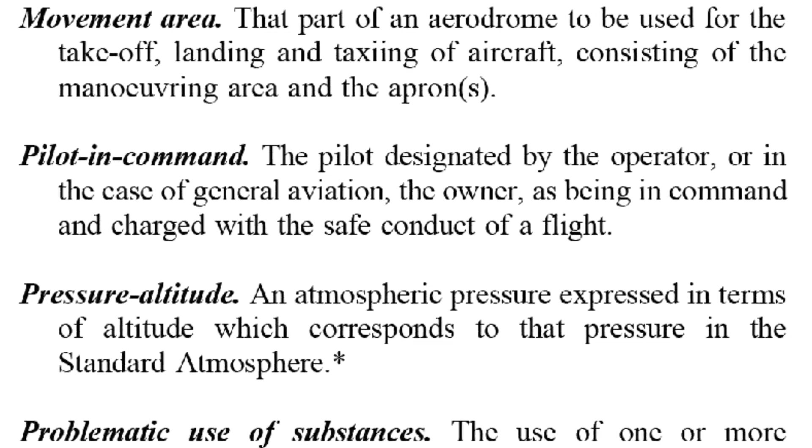Movement area: that part of an aerodrome to be used for the takeoff, landing, and taxiing of aircraft, consisting of the maneuvering area and the apron.

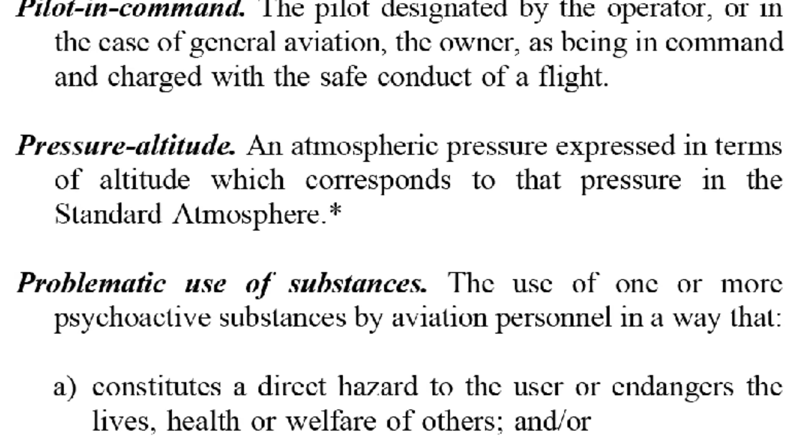Pilot in command: the pilot designated by the operator, or in the case of general aviation, the owner, as being in command and charged with the safe conduct of flight.

Pressure altitude: an atmospheric pressure expressed in terms of altitude which corresponds to that pressure in the standard atmosphere.

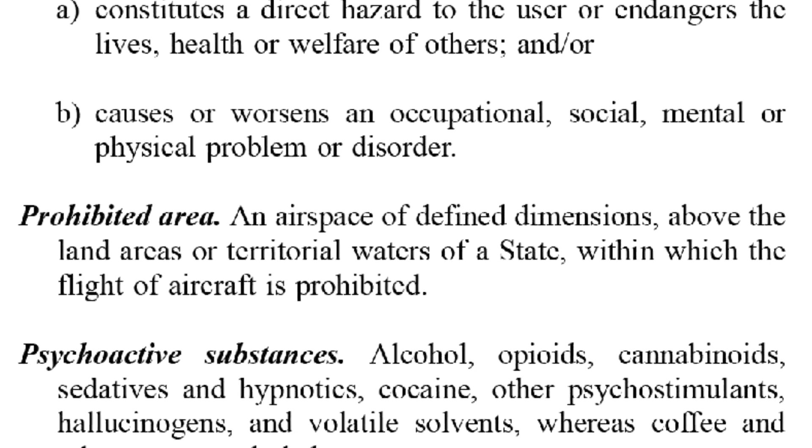Problematic use of substances: the use of one or more psychoactive substances by aviation personnel in a way that (a) constitutes a direct hazard to the user or endangers the lives, health, or welfare of others, and/or (b) causes or worsens an occupational, social, mental, or physical problem or disorder.

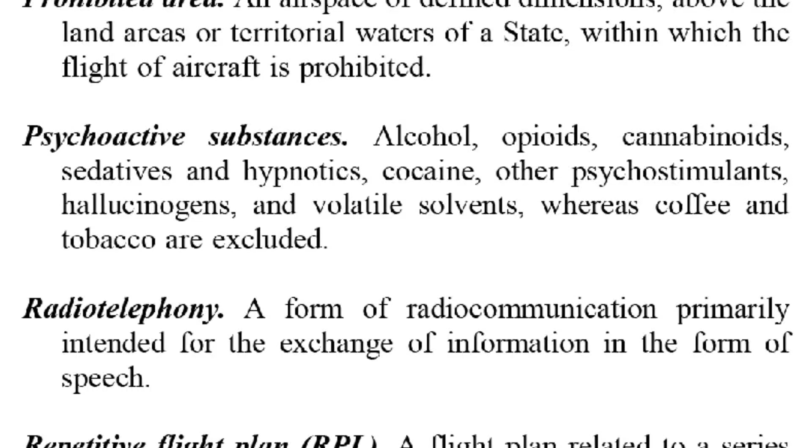Prohibited area: an airspace of defined dimensions above the land areas or territorial waters of a state, within which the flight of aircraft is prohibited.

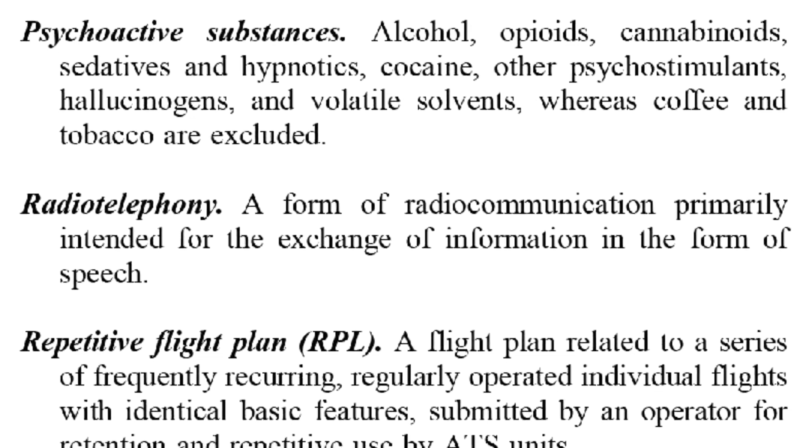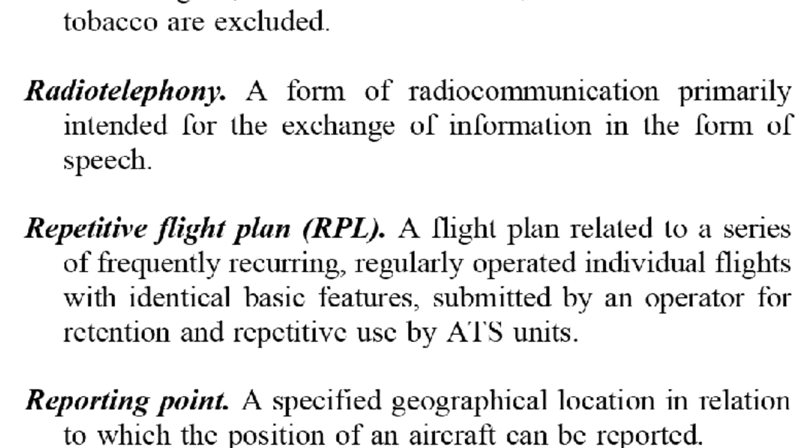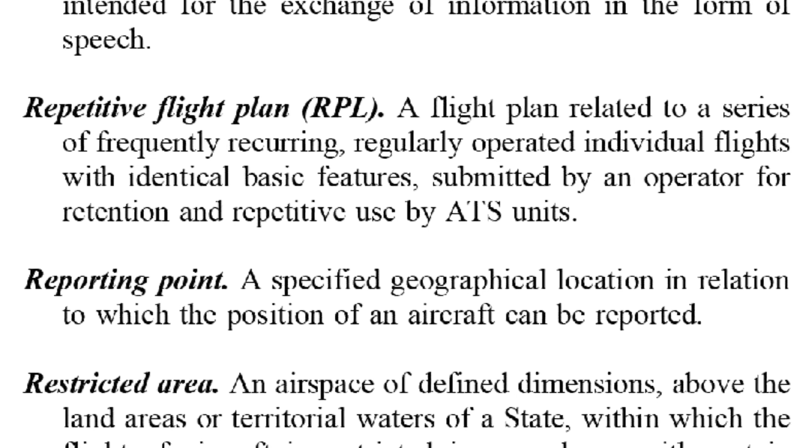Psychoactive substances: alcohol, opioids, cannabinoids, sedatives and hypnotics, cocaine, other psychostimulants, hallucinogens, and volatile solvents, whereas coffee and tobacco are excluded. Radiotelephony: a form of radio communication primarily intended for the exchange of information in the form of speech.

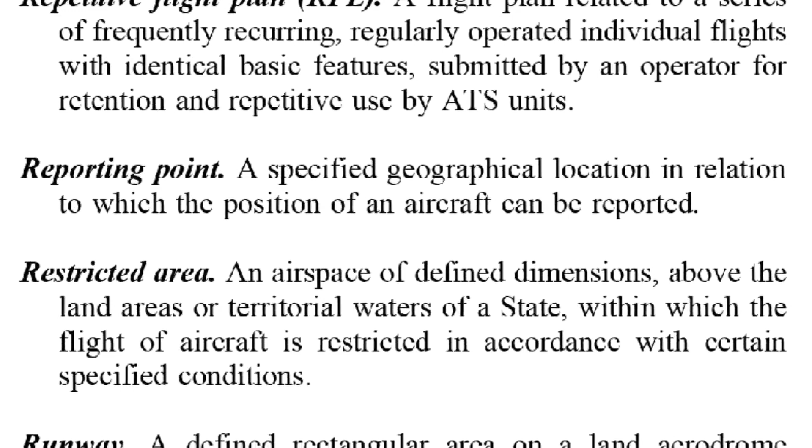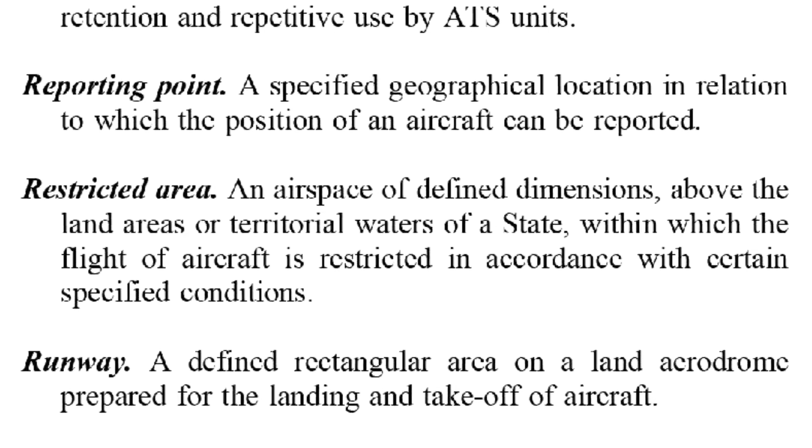Repetitive Flight Plan, RPL: a flight plan related to a series of frequently recurring, regularly operated individual flights with identical basic features, submitted by an operator for retention and repetitive use by ATS units.

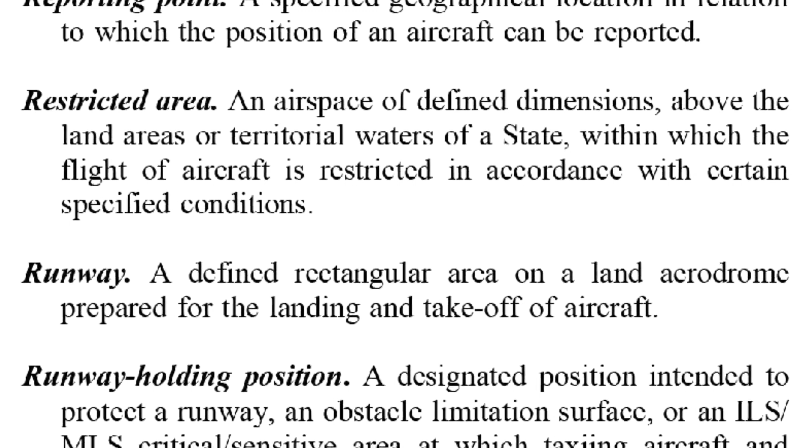Reporting point: a specified geographic location in relation to which the position of an aircraft can be reported.

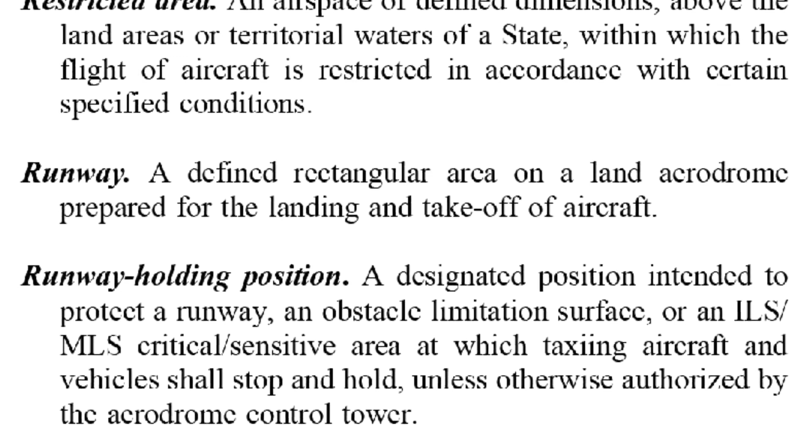Restricted area: an airspace of defined dimensions above the land areas or territorial waters of a state, within which the flight of aircraft is restricted in accordance with certain specified conditions.

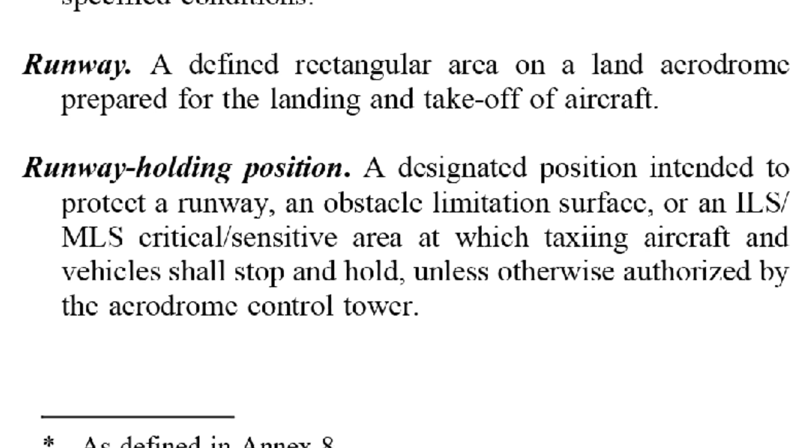Runway: a defined rectangular area on a land aerodrome prepared for the landing and takeoff of aircraft.

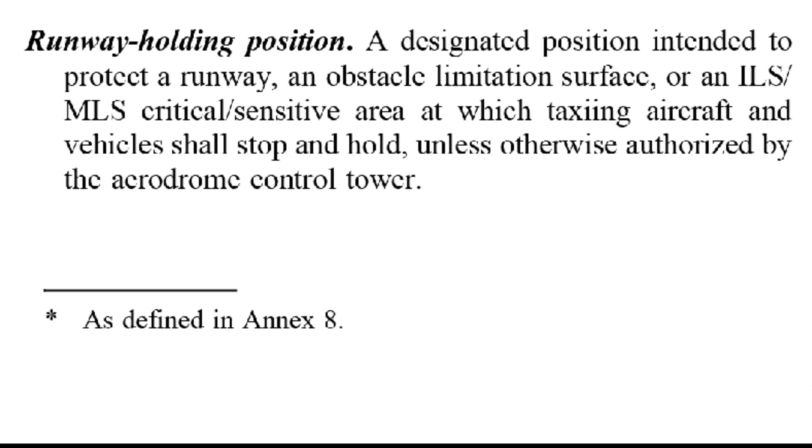Runway-holding position: a designated position intended to protect a runway, an obstacle limitation surface, or an ILS or MLS critical or sensitive area, at which taxiing aircraft and vehicles shall stop and hold, unless otherwise authorized by the aerodrome control tower. Note: in radiotelephony phraseologies, the expression 'holding point' is used to designate the runway-holding position.

Safety-sensitive personnel: persons who might endanger aviation safety if they perform their duties and functions improperly, including but not limited to crew members, aircraft maintenance personnel, and air traffic controllers.

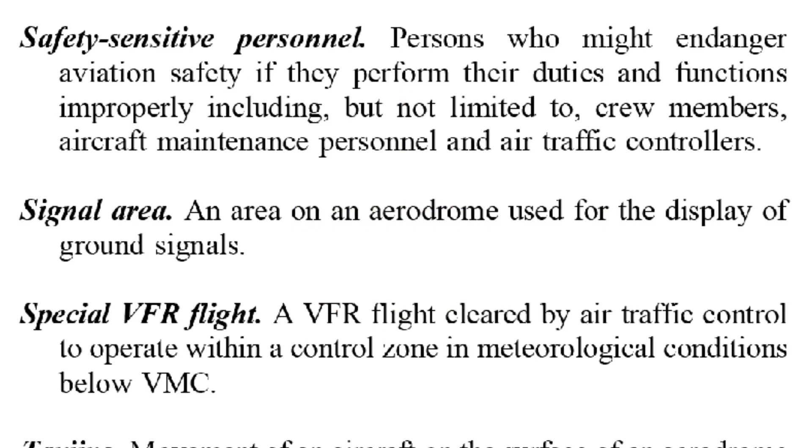Signal area: an area on an aerodrome used for the display of ground signals.

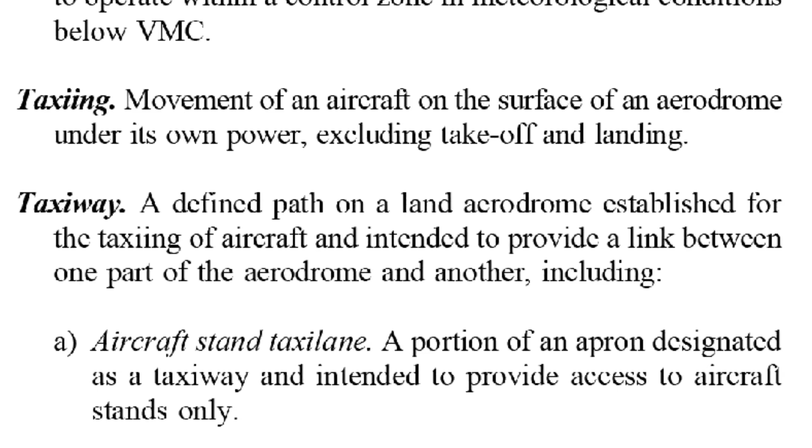A special VFR flight: a VFR flight cleared by air traffic control to operate within a control zone in meteorological conditions below VMC. Taxiing: movement of an aircraft on the surface of an aerodrome under its own power, excluding takeoff and landing.

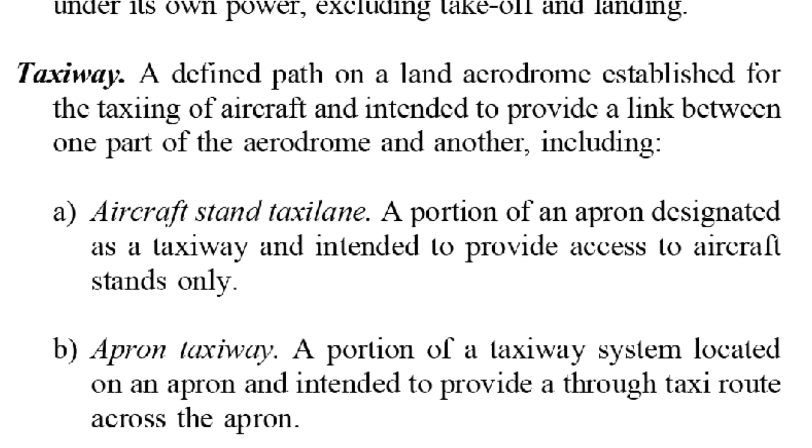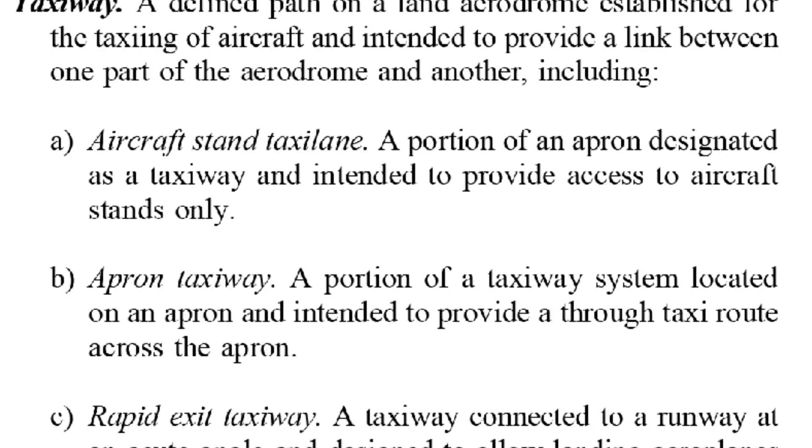Taxiway: a defined path on a land aerodrome established for the taxiing of aircraft and intended to provide a link between one part of the aerodrome and another, including (a) aircraft stand taxi lane, a portion of an apron designated as a taxiway and intended to provide access to aircraft stands only, and apron taxiway, a portion of a taxiway system located on an apron and intended to provide a through taxi route across the apron.

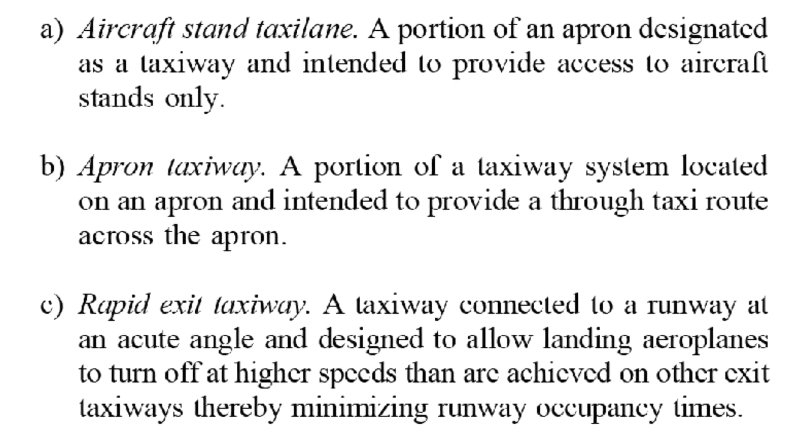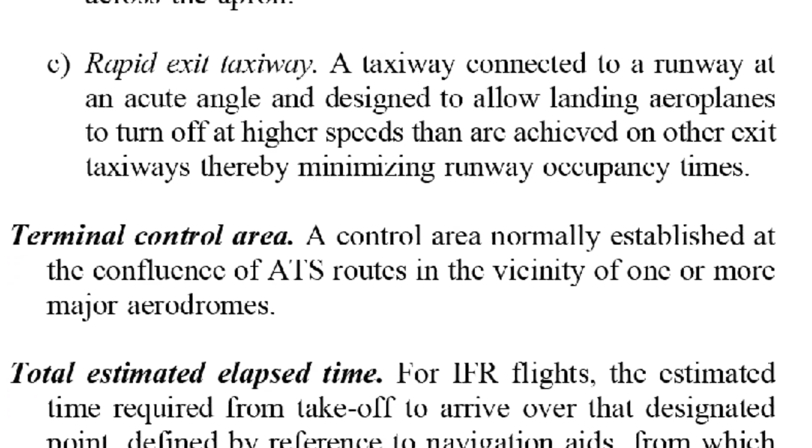Rapid exit taxiway: a taxiway connected to a runway at an acute angle and designed to allow landing aeroplanes to turn off at higher speeds than are achieved on other exit taxiways, thereby minimizing runway occupancy times.

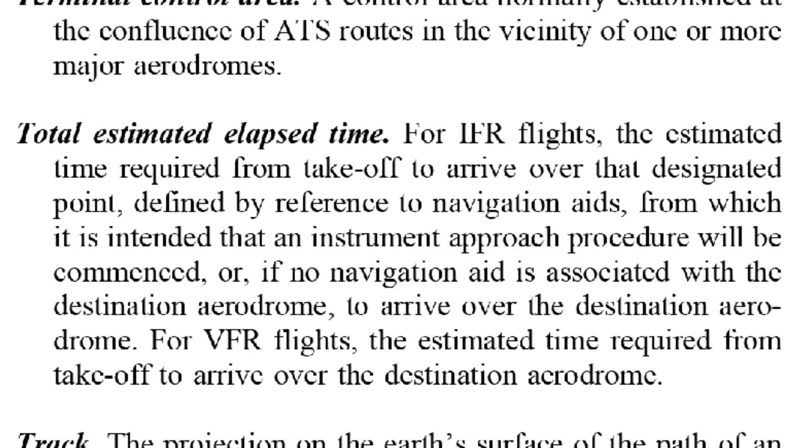Terminal control area: a control area normally established at the confluence of ATS routes in the vicinity of one or more major aerodromes. Total estimated elapsed time.

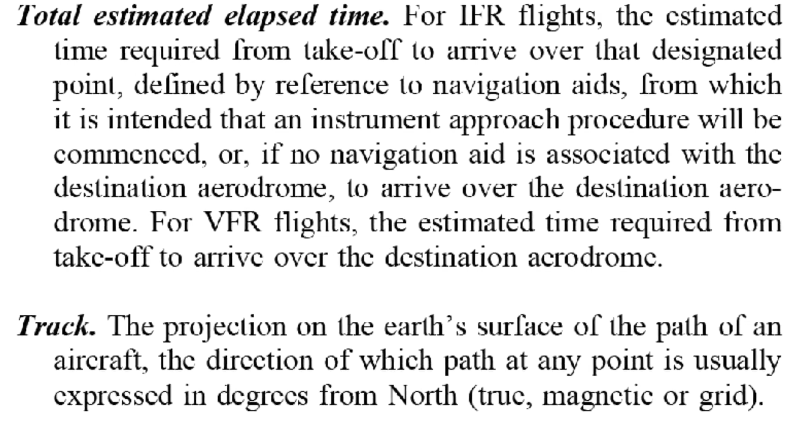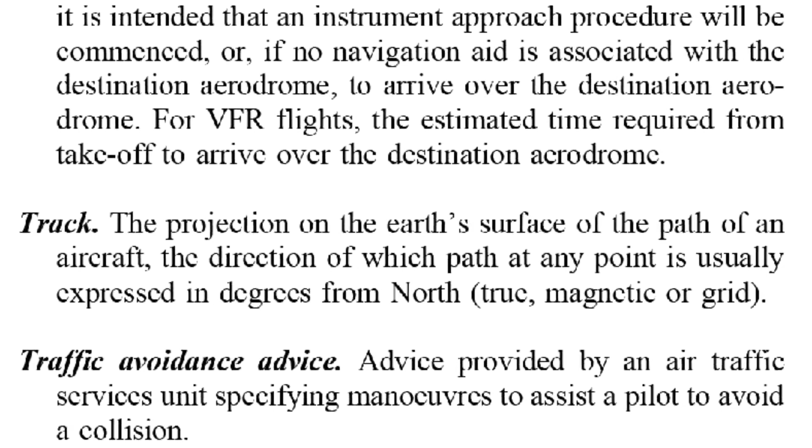For IFR flights: the estimated time required from takeoff to arrive over a designated point, defined by reference to navigation aids, from which it is intended that an instrument approach procedure will be commenced, or if no navigation aid is associated with the destination aerodrome, to arrive over the destination aerodrome.

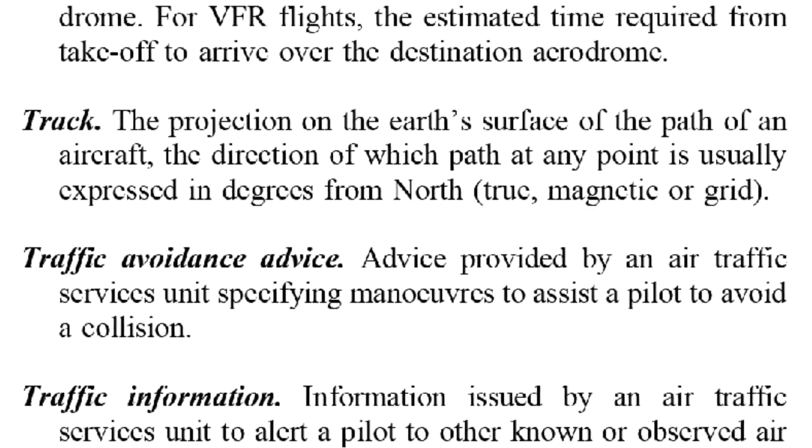For VFR flights: the estimated time required from takeoff to arrive over the destination aerodrome.

Track: the projection on the Earth's surface of the path of an aircraft, the direction of which path at any point is usually expressed in degrees from north, true, magnetic, or grid.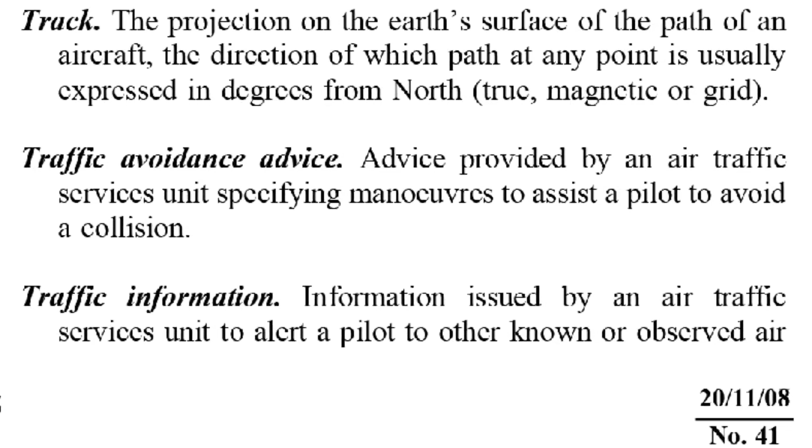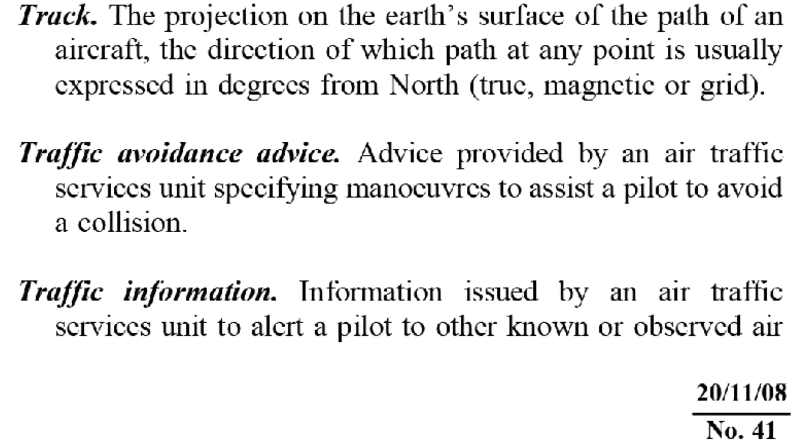Traffic avoidance advice: advice provided by an air traffic services unit specifying maneuvers to assist a pilot to avoid a collision. Traffic information: information issued by an air traffic services unit to alert a pilot to other known or observed air traffic which may be in proximity to the position or intended route of flight, and to help the pilot avoid a collision.

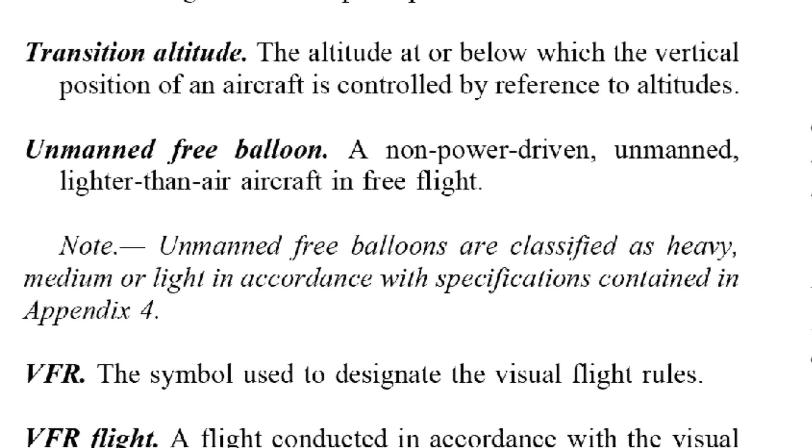Transition altitude: the altitude at or below which the vertical position of an aircraft is controlled by reference to altitudes.

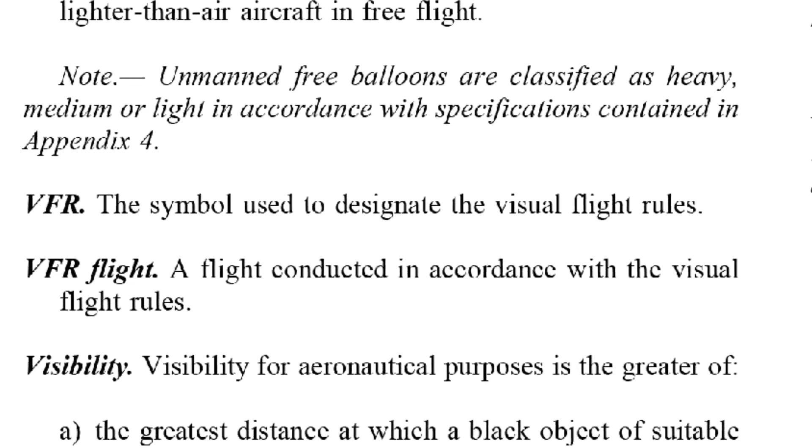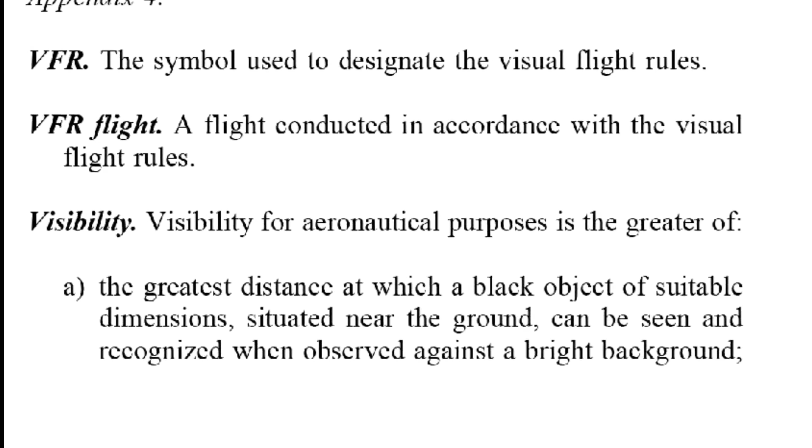Unmanned free balloon: a non-power-driven, unmanned, lighter-than-air aircraft in free flight. Note: unmanned free balloons are classified as heavy, medium, or light in accordance with the specification contained in Appendix 4. VFR: the symbol used to designate the visual flight rules.

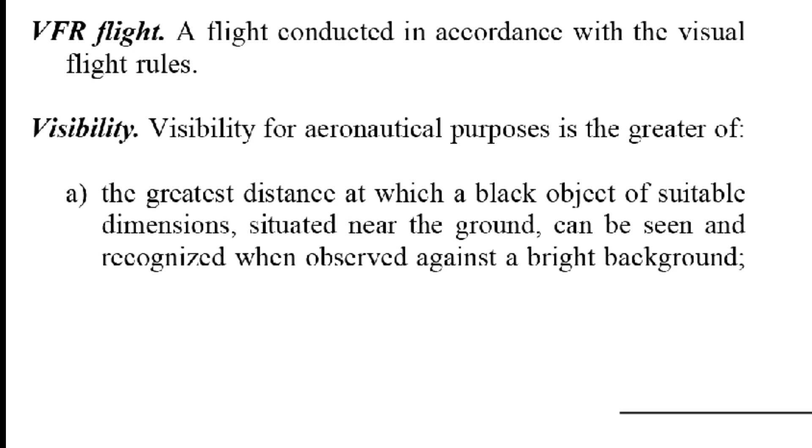VFR flight: a flight conducted in accordance with the visual flight rules. What is visibility? Visibility for aeronautical purposes is the greater of: (a) the greatest distance at which a black object of suitable dimensions situated near the ground can be seen and recognized when observed against a bright background.

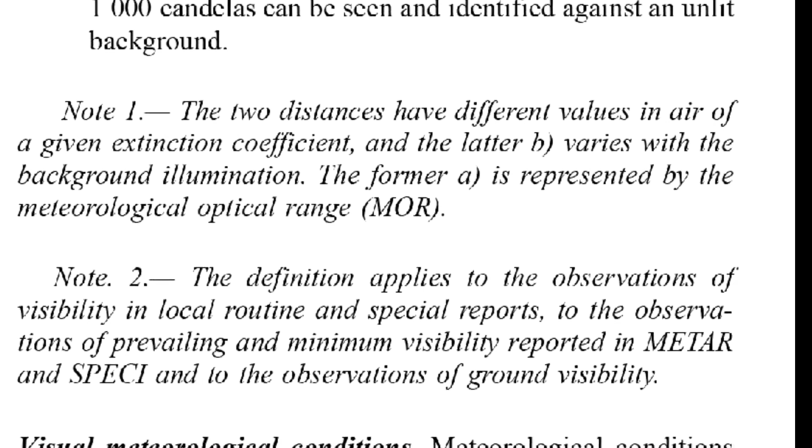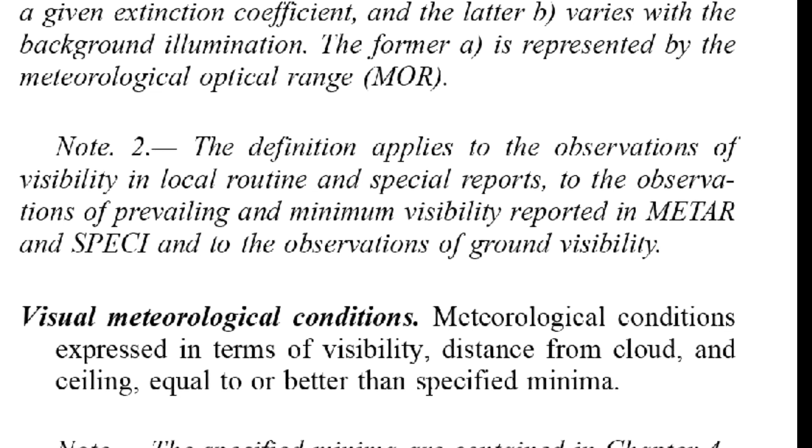(b) the greatest distance at which lights in the vicinity of 1000 candelas can be seen and identified against an unlit background. Note 1: the two distances have different values in air of a given extinction coefficient, and the latter, B, varies with the background illumination.

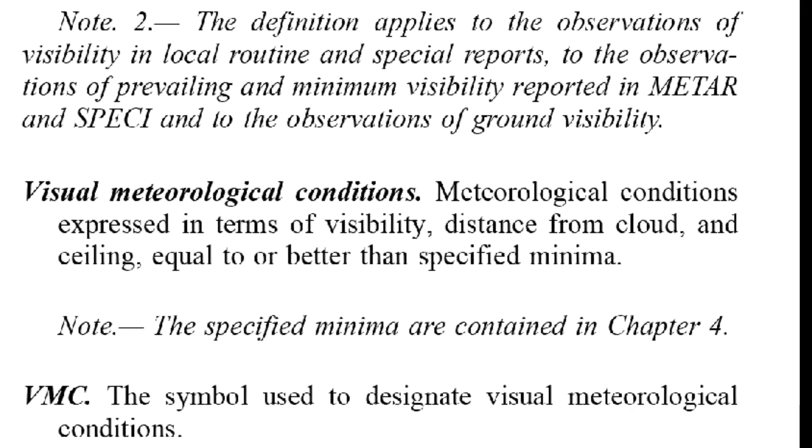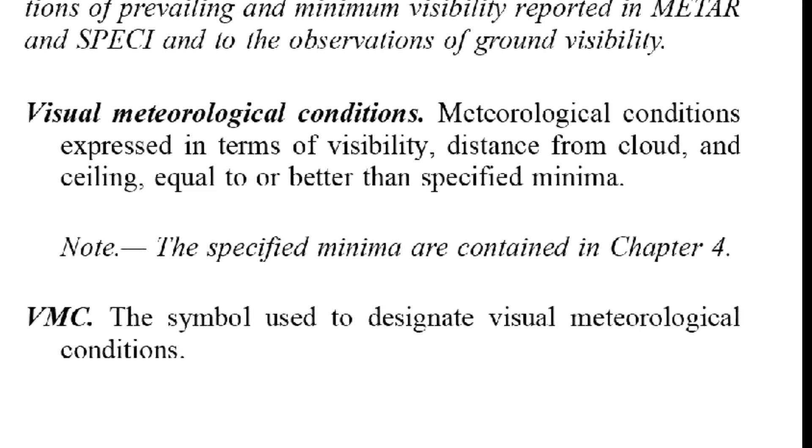The former, A, is represented by the meteorological optical range, MOR. Note 2: this definition applies to the observation of visibility in local routine and special reports, to the observation of prevailing and minimum visibility reported in METAR and SPECI, and to the observations of ground visibility.

Visual meteorological conditions: meteorological conditions expressed in terms of visibility, distance from clouds and ceiling, equal to or better than specified minima. Note: the specified minima are contained in Chapter 4 of this document. This is the last definition of the first chapter of this document: VMC, the symbol used to designate visual meteorological conditions.